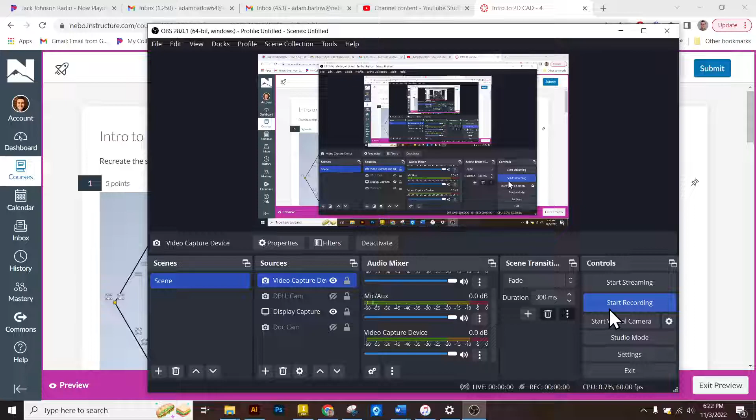Welcome to 2D CAD number 4. So this one has 3 objects as well. We've got a little hexagon honeycomb shape, kind of a little hatch, kind of a trapdoor look, and a wheel sort of thing. So all these parts can be made in Inventor, and we'll do them one at a time.

So some of these are really easy, and some are going to take a little bit more time for us to do. So I'm going to go File, New, Center Part, Create, in Inventor. And I'm going to start sketching on this surface. So whenever we're doing a polygon, we go over to the rectangle tool and hit the drop down. And there's a whole ton of awesome things in here. We've got different tools for the rectangle, for slots with an arc in it. But polygon is at the very bottom.

Click there, and I think it defaults to 6 sides. We're just going to go for it. I'm just going to click in the center, and I'm going to try and make this look as flat or as level as possible, and right there. Just to make sure it's level, I'm going to use the horizontal tool right here and lock it. And then it says it's 3 inches tall on the parallel side, so I'll go from here to here. I'll say 3, enter, so it'll get quite a bit bigger.

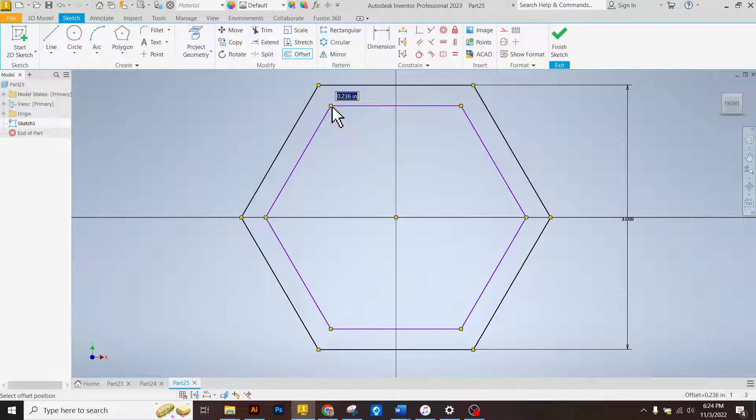Awesome. And now there is a part right here that's a little smaller, so it's the same shape, it's a hexagon, but it's 0.5 inside the larger one. So what I'm going to do, oh, wrong one, is come in here and use the offset tool. So that's right here, offset, I'm going to click here, and you can make the lines you selected larger or smaller. I'm going to type in 0.5 and hit enter, finish sketch, and voila, that's all I got to do.

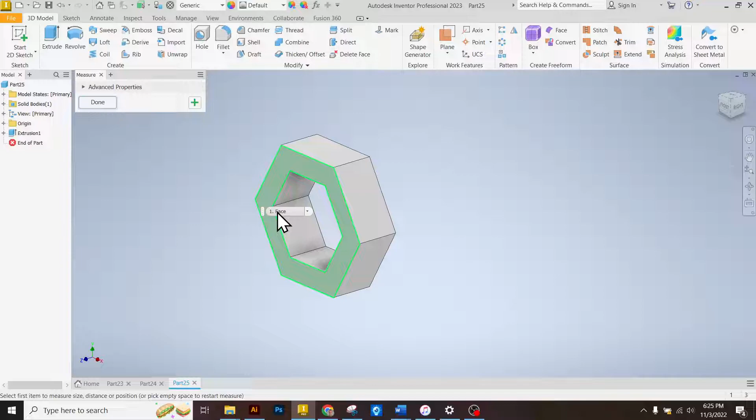So hit extrude, click only the outer rim there, and click OK, and then use M to measure the outside face right there, and plug in your answer. And that's it. So that one's pretty easy, huh? So we'll go to the next one, which is this little hatch.

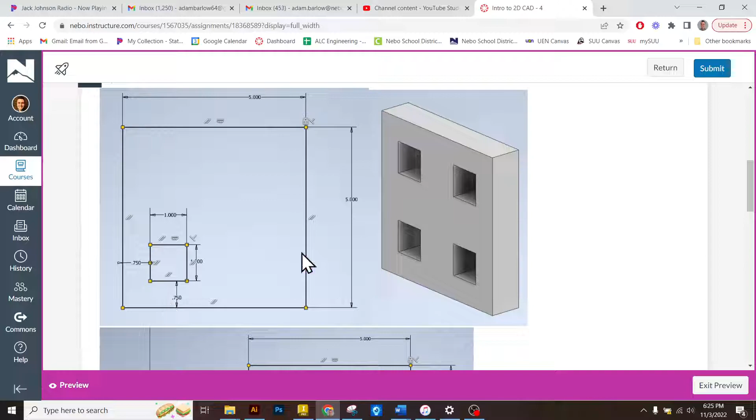So I'll go File, New, Center Part, Create, and I'm going to start 2D sketch on the surface. I'm going to kind of go in the corner here so you can see it better. And it looks like the overall shape is 5 by 5, and then there's a 1-inch square in the bottom left, and it's off by 3/4 of an inch. So 5, 1, 3/4.

I'm going to use my 2-point rectangle tool, and I'm going to type in, as I'm making it, 5, tab, 5, enter. And that makes it 5 by 5. Awesome. I'm going to make the little square down here, that's 1, tab, 1, enter. I'm going to use my dimension tool, or I can click D for the dimension tool. And I click this line here and make it 0.75, hit enter. Click here, 0.75, enter. And that looks good.

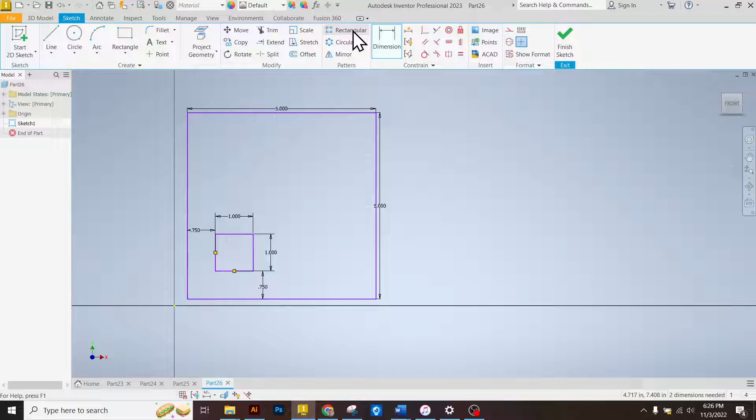So what I'm going to do now is use a new tool called the rectangular pattern tool. So the rectangular pattern is awesome. You can make patterns in more than one direction. It's usually meant for the X and the Y directions, but you can use it in a variety of ways. So we're just going to use it in a simple manner right now. And it's going to say, what geometry do you want to make a pattern of? I'm going to just highlight everything right here, or I can click each of those one by one. And then I'm going to say direction 1 and direction 2.

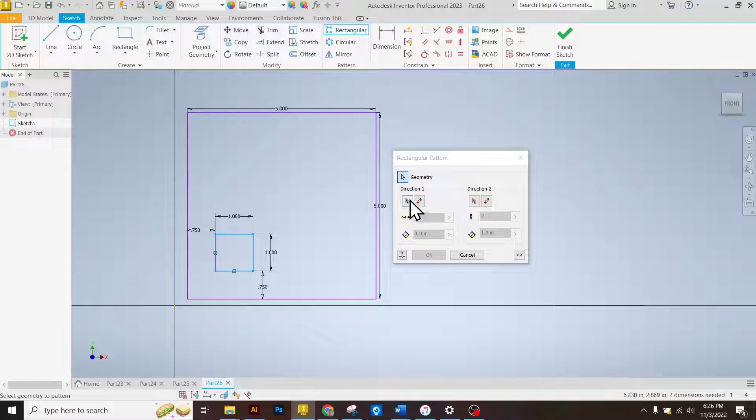So by direction 1, I have to define it with this red arrow here. I can say this is my first direction. And notice there's a green arrow here that's pointing down. I can flip that one to go up. So now it's trying to make it go up that way.

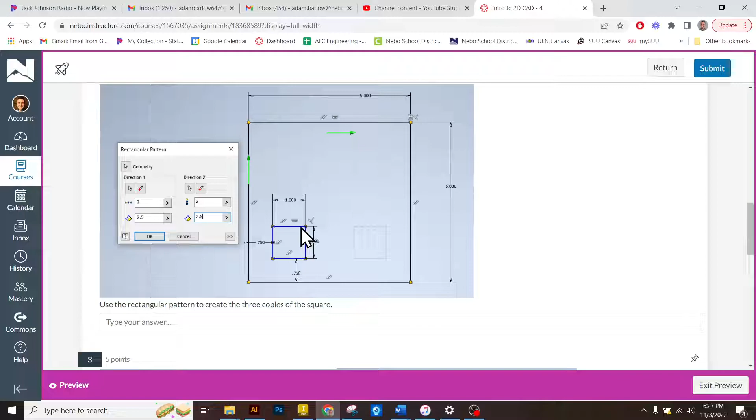And I need to remember what settings I used in here. So there's 2. This means I'm going to make 2 copies. So there's one here and a second there. One being the original, and then they're spaced at 2.5 inches. So I'll just copy that information. There's 2, and I'll say 2.5.

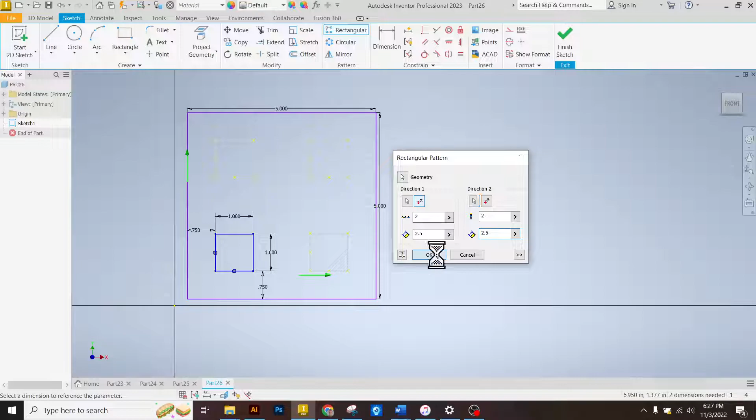I'll go direction 2, and I'm going to click the perpendicular line. It's going this way, and it's already gone the right direction, so that's good. I'll just change it to 2.5, and look at that. It's coming together, and if I click OK, boom, got it. Made a rectangular pattern very quickly and very easily.

So I'll say Finish Sketch. And we're ready to extrude, 1 inch. Awesome. Hit M, and you can inspect the surface and figure out what size that is exactly in square inches, and you're good to go.

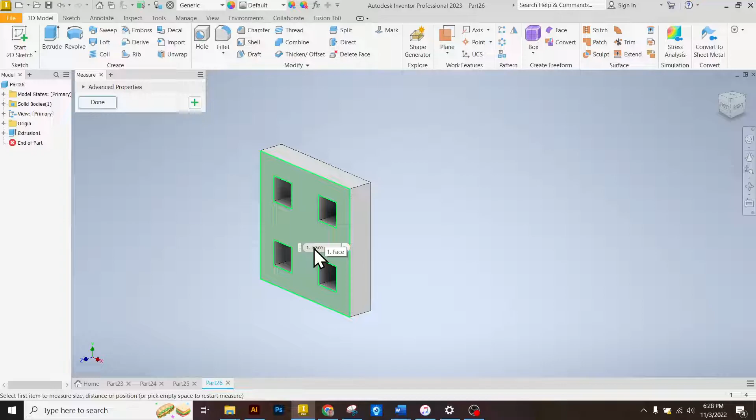All right, so the next one is going to be the circular pattern. So this one is, I think, actually easier than the rectangular pattern. We're just going to make this and then make a pattern that goes in a circle, and we're going to have 6 holes, 6 iterations of that feature go all the way around, so it looks like that. And it looks like this one has a diameter of 0.5, and this one has a diameter of 3.

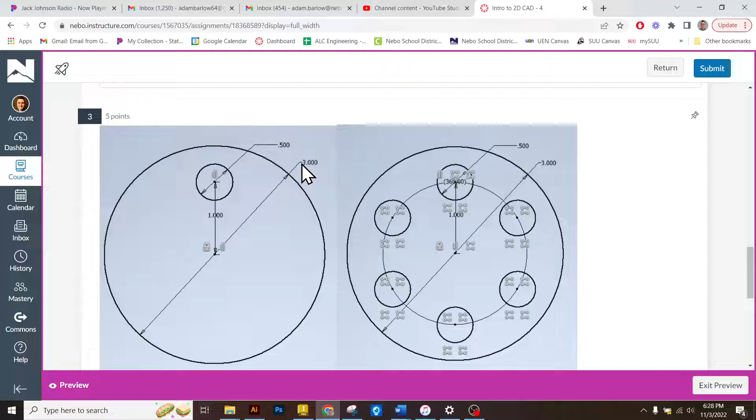So we'll go back here to Inventor. I'll say File, New, Standard Part, Create, and Sketch here. Do a circle, just for kicks I'm going to go right in the middle. And it was 3, Enter. Good. I'm going to make another circle right here. That is 0.5, Enter. And that one is also placed 1 inch from the center. So I'm going to go dimension center point to center point and make it 1 inch. Hit Enter. Cool.

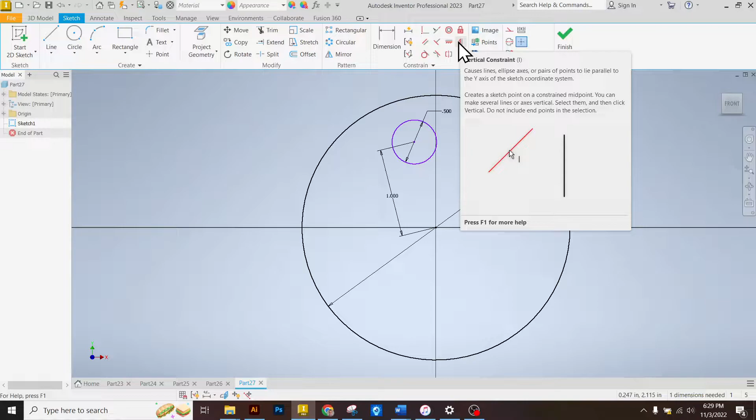So that looks like it's good, right? But if I click here and I try to move this around, you'll notice it can rotate. It's still blue, so it isn't fully constrained yet. So a really cool function of circles is I can use the vertical or horizontal tools to line up the center point. In this case, I'm going to use my vertical tool. I'll click the center point of the first one and of the second one. Nice. So now it's all black, and if I try to move anything, it all stays put, which is good.

All right, so then the fun part. I'm going to go over here to circular pattern. It's right below rectangular pattern. And I'm going to click on this circle. And then it's going to say, what axis, or pathway, I should say, do I want to use to make my pattern. I'm going to click the red arrow. Click the outer circle. Excuse me. I'm going to click the outer circle.

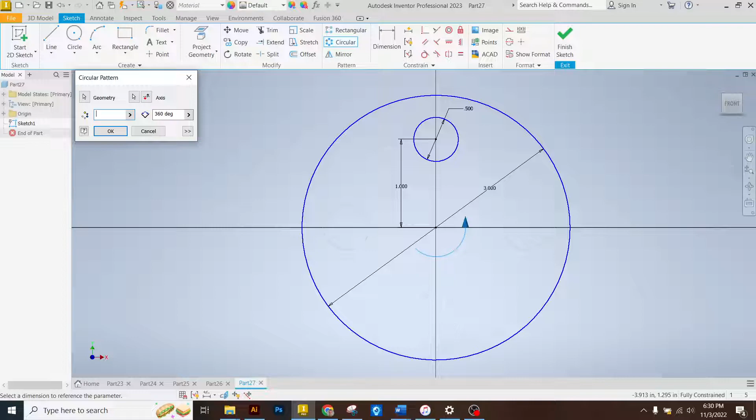And it will default to 6, but just for fun, let's try 60, you get a whole bunch and it looks nuts. I wouldn't do more than 600 because your computer might crash, but let's try just like 3, that looks cool, 4, 10, whatever, but for the activity, I want 6. I'll click OK. And then finish sketch and extrude right there. 1 inch, and I will say OK.

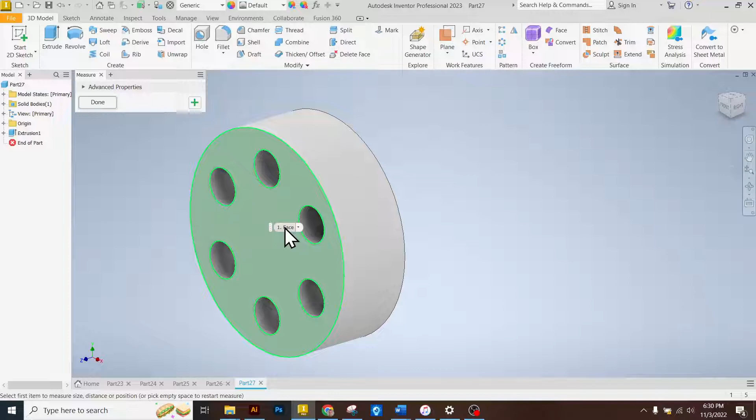Awesome. So I can hit the M tool, measure this surface, and it will tell me the area in square inches, and life will be a dream. Okay. So that's it.